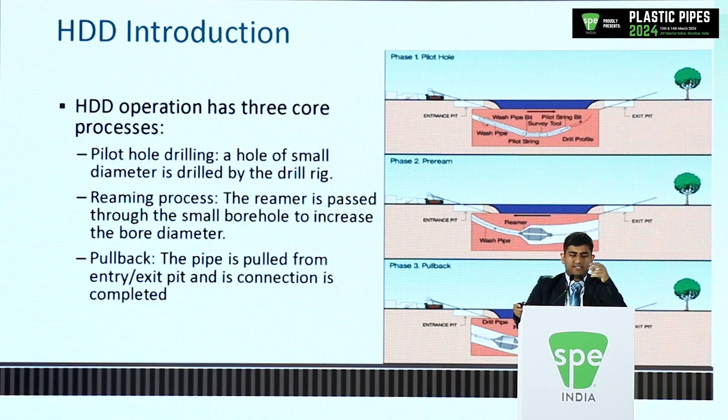And then there's the pullback process, which is where your role, your machine, your product comes in. Your product pipe is pulled back through the borehole, which is expanded via the reaming process.

So when we are talking about pullback force, it's basically the force required to pull the pipe, plastic pipe or whatever material pipe it is, through the borehole from the entry of the pipe to the exit of the borehole.

It must overcome two things: the friction caused by the ground, as well as the drag forces caused by the drilling fluid. We are drilling in the ground and require a lot of fluids passing through. Bentonite is there, and other mixed compositions go in there, so there's bound to be drag force involved.

In this session, we'll see the differences in why drag force causes a difference in mechanism or design as well.

This is a quick video. I think it plays, right? Yeah, so this is a quick visualization of the site conditions during the pullback stage, what your products actually go through in this process.

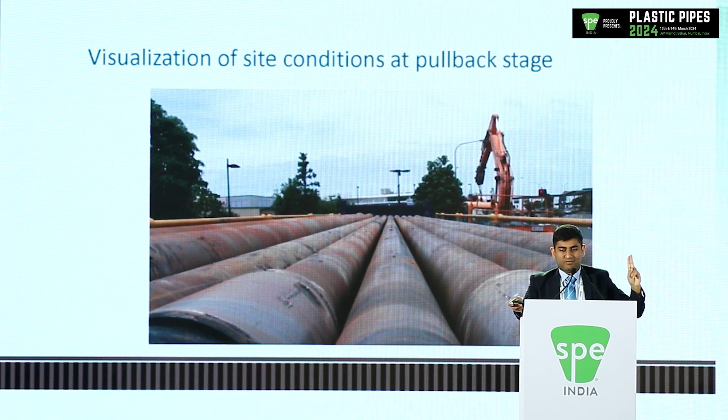This is the one end where the HDD machine, your drill rig, is present, and it's going to pull back the pipe through that entire borehole. In this case it's a steel pipe, but basically this whole process is generic for all types of pipe materials.

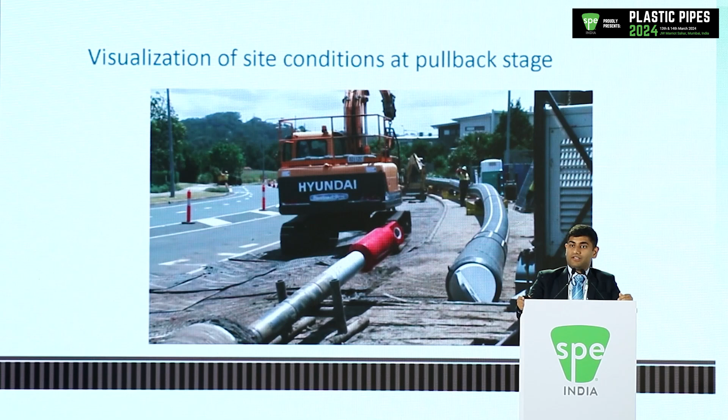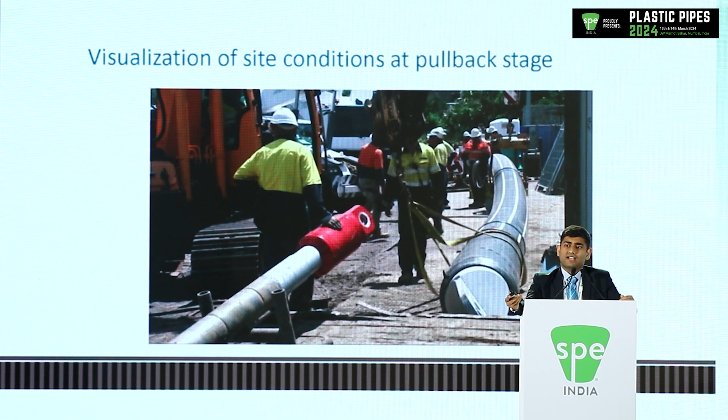You may observe that there's a reamer also attached before it to make sure you have a clear pass. Why is it important to have a clear pass? I'll show you in the form of images.

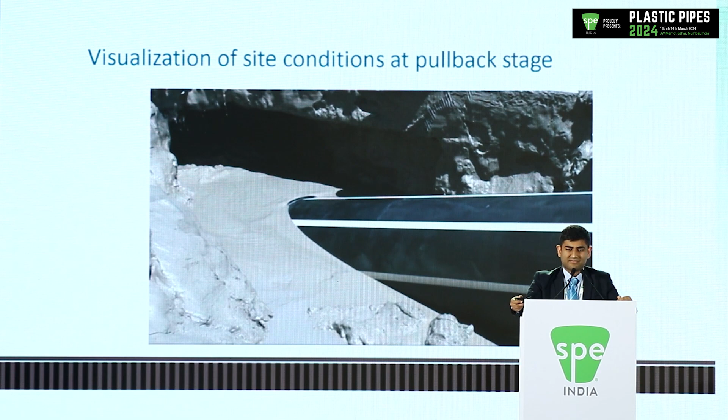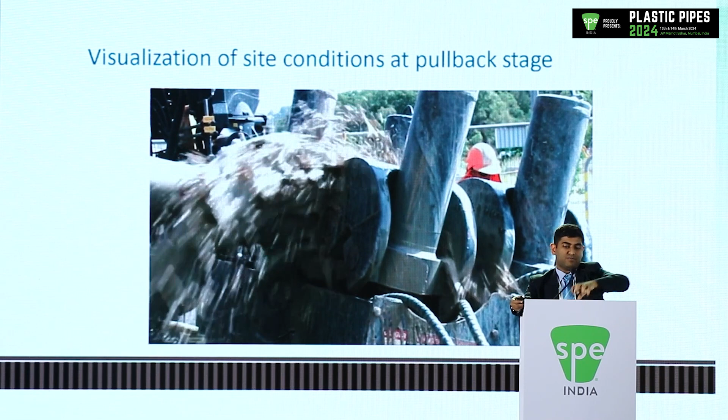Basically, each drill pipe is taken out. In that process, it's untied, taken out, then your rig gets attached to the next one, and it's pulled back again, and that series of process goes on and on.

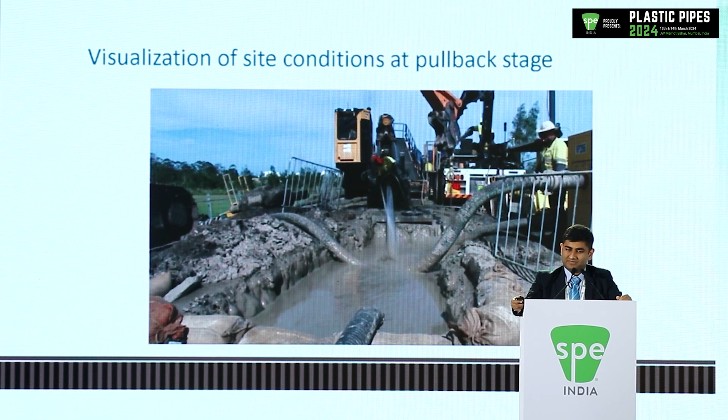And you see, this is called the luckiest day of your contractor.

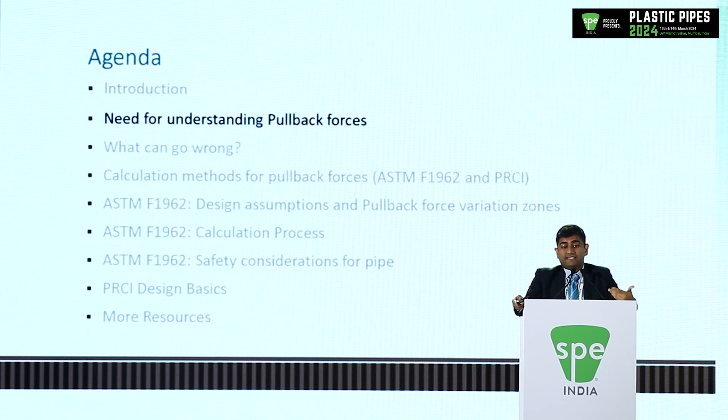So now that we have gone through this process, now that we have seen how it looks above the ground, why is it essential to know these forces? That is the challenge, right?

When we are talking about determining these pullback forces, it comes down to our conditions to set the project parameters. First, we need to know the strength of our machine, and that strength dictates the selection of your drilling rig.

The second point is where you guys come into play, which is pipe material and type selection. Your pipe's ability to bear tension as well as surface damage dictates which pipe is selected for this particular project.

When we are talking about these aspects, typically the failure we talk about is more in kinking or tensile failure of the pipes. That's where we determine the parts where we are bound to experience the most forces, through understanding the exponential effects of the small parameters present in the ground.

Small parameters, we talk about lubricating the ground using drilling fluids, right? But those drilling fluids still only minimize the friction, they don't make a frictionless surface. God would help us if we could make a frictionless surface - everything would be ideal for an 11th grade physics student.

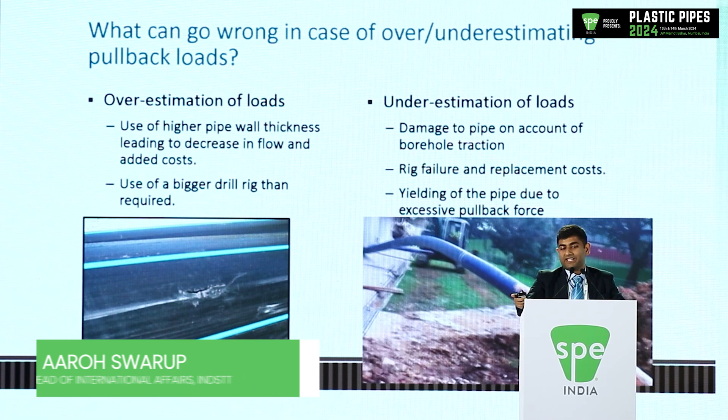Then the underestimation of loads is the other part, where I'll play this video of what happened in case of a rig failure. This was a rig failure situation, and mid process they had to take out a pipe using a crane. Messy situations, messy.

So let's discuss quickly and go over the methods of calculation of these forces. There are two typical methods: ASTM F1962 - these formulations are based on the 2011 iteration, and there's a 2022 iteration as well where not much has changed, just a couple more parametric additional conditions, nothing too special. The other method is the PRCI method, Pipeline Research Council International.

The ASTM method is what we'll typically deal with for most projects, and it accounts for flexible pipes where bending stresses are not very significant. The drag forces in these calculations tend to be a function of the diameter itself. This method does not account for the length of the pipe. It can be designed for all flexible pipes, but typically best case is for PE, HDPE, plastic ones.

The PRCI method goes for pipes with higher bending resistance. So when we talk about bending resistance, we're talking about bending radius, the forces that it has to bear due to bending loads. And then we're talking about the drag force being a function of the length inside the borehole as well.

So a quick go over regarding the ASTM method. These are some design assumptions: the pipe is a flexible pipe, friction is directly proportional to the normal forces - basic rules of physics. Tension amplifies at bends - this is the rule in physics we learn as Capstan's law, where around the pulley we experience exponential growth in friction when dealing with cables passing around a pulley.

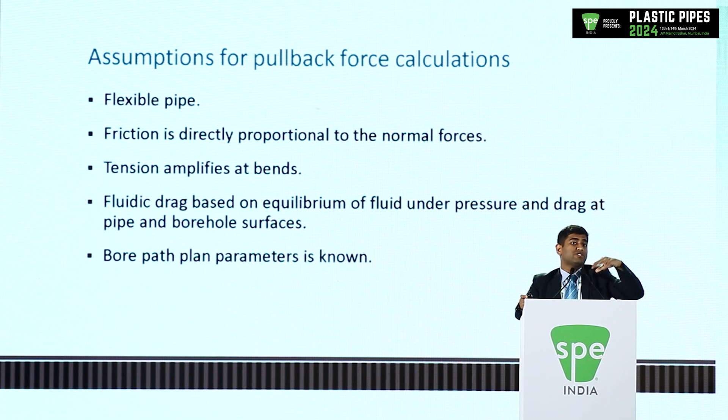Basically, this is where we discuss the operations design part. That is the project design part. We are talking about the operations design part.

The whole idea is that we divide this project into 4 segments. L1 is the part where the pipe enters your ground or enters the borehole with an incline angle of alpha. The exit angle is angle beta, and then there's a descent part. The horizontal length of the descent is called L2. The horizontal length parallel to the ground is L3, and then there's an ascending length called L4. These are the typical formulation parts essential for the design aspects.

The important items for the manufacturers and everyone here are the parameters typically used for selection of pipes: the diameter of the pipe, the diameter ratio - that is the outer diameter and the wall thickness, the length of crossing, the straight length of the pipe, the coefficients of friction at the surface as well as the lubricated borehole, entry and exit angle, preferably in radians. You can always convert, there's calculators everywhere. And then max depth of the borehole in meters, since we are doing SI units, it has to be in meters.

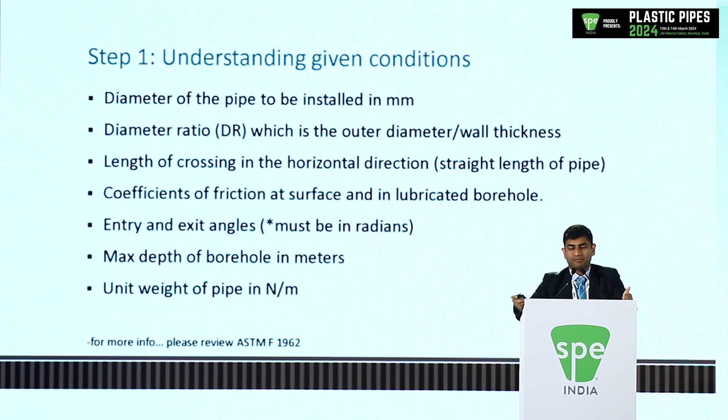Unit weight of the pipe in Newton per meter. Another 3 elements are specific gravity of the mud slurry, relative density, and the safe pulling stress of the pipe material - that's where you provide the information. Borehole diameter is typically 1.5 times the diameter of the pipe, that's a rule of thumb that industry follows during an HDD operation.

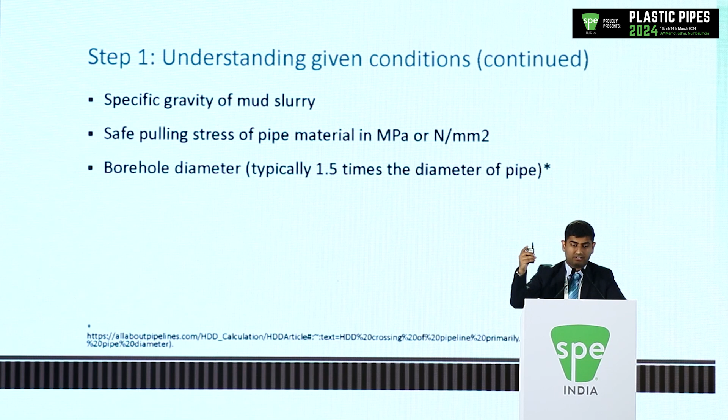So in terms of calculating these lengths, I'll quickly go over this. The L2 and L4, the ascent and descent lengths, are formulations based on trigonometry and arc circular formations.

Your first length, L1, the length at the entry of the pipe, is assumed to be 30 meters or 100 feet, whichever unit system you're following.

L3 is what your project parameters will dictate, typically the crossing or the design required for you to cross.

In a lot of cases, L3 can be 0, where you simply descend and automatically start ascending. So that is also a simple situation.

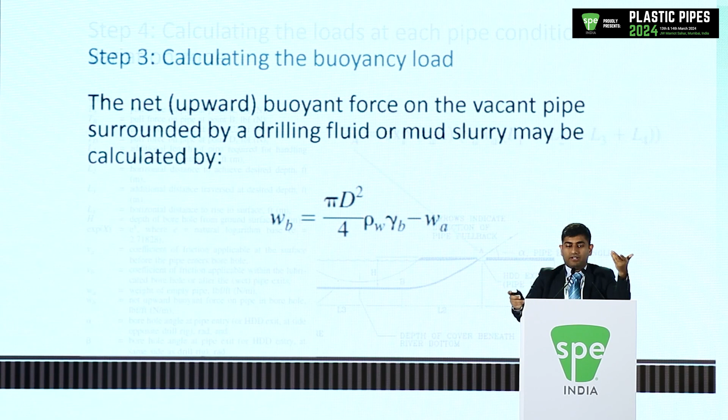Calculating buoyancy loads involves basic physics, your downward force versus the buoyant force of the drilling fluid. Then we talk about 4 zones of tension where your pipe will experience tension.

Zone A is the entry zone. Zone B is where the entry zone's force plus the friction come into play.

Buoyancy reduction, buoyancy resistance, and other parameters come into play, and they are multiplied by the exponential factor, which is basically the angle with which it changes the curvature of the path.

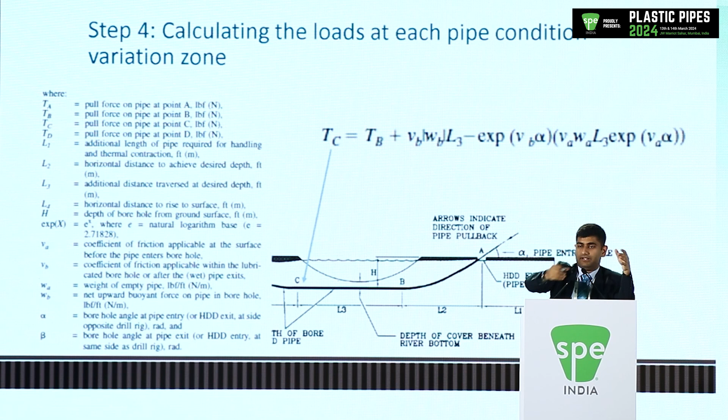The same goes for tension at zone C, where your friction gets added up and your curvature at the ascending portion comes into play. Then we have tension at zone D, the exit zone.

This happens to be the zone which will bear the most tension, the zone where you will face the maximum amount of force required to pull the pipe outside the ground.

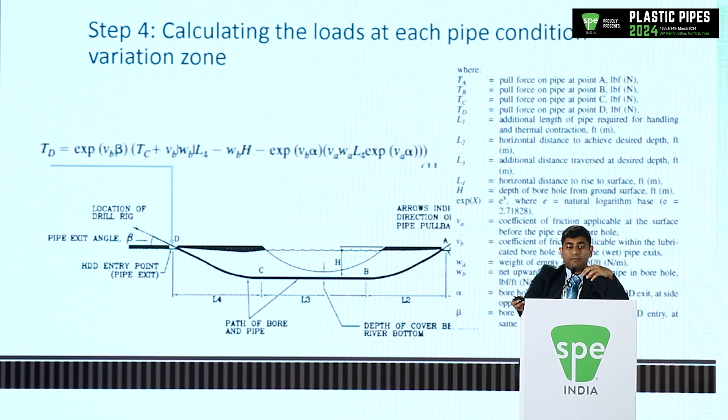Once you have maximum values of tension at zones A, B, C, and D, which is most likely going to be zone D, you add that force along with the drag force caused by the drilling fluid.

Drag force is simply this formulation: 0.07 megapascals times pi times d squared by 8, d squared minus d of the pipe, the diameter of the pipe.

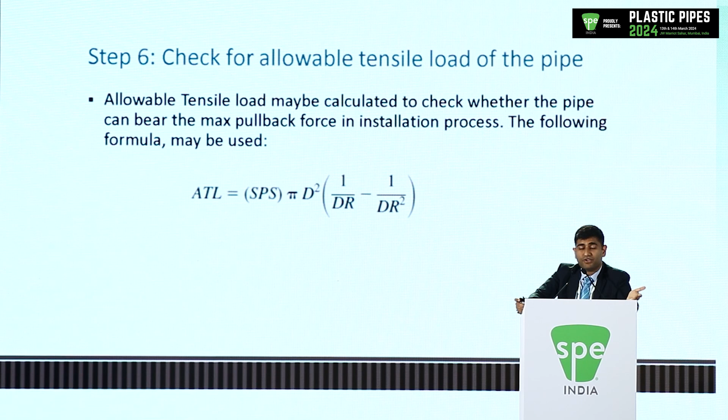Then you compare that value with the allowable tensile load of the pipe, and this is the formulation for that. This typical formulation is the simple physics formula that we've learned over the ages.

Safety considerations when we are talking about pullback parameters, the pullback situation.

In mid construction, when we are experiencing this, we should also account for thermal stresses and for reduced strength in materials, such as PE or plastic materials.

We should also account for the loading during the process. Since we are crossing, that means operations of the existing utilities continue without any hesitation.

Post construction, the important part is the as-built drawings, which should be approved by a utility engineer at the maximum to make sure that the information out there is realistic.

This is important for your clients and utility owners. The whole idea for as-built drawings to be accurate is to make sure that others don't hit your pipe.

Inspection and cleanup by certified HDD operators, assessors, and designers is where this entire post-construction process should also be maintained. Mr. Huck mentioned the annular gap present between the pipe and the borehole, which requires stabilization.

Those aspects are there, and your cleanup material should be environmentally friendly. These aspects are very essential when dealing with operations among civilians.

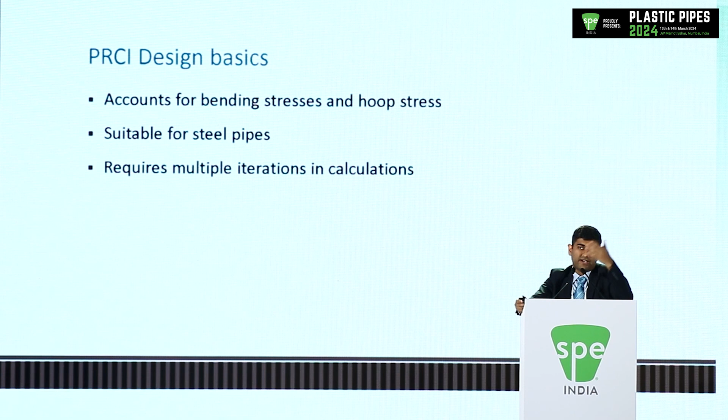It's calculated, then revised, then changed—we adjust the diameter, wall thickness, and diameter ratios and so on. I'll quickly go over this since it's less relevant to the current conference.

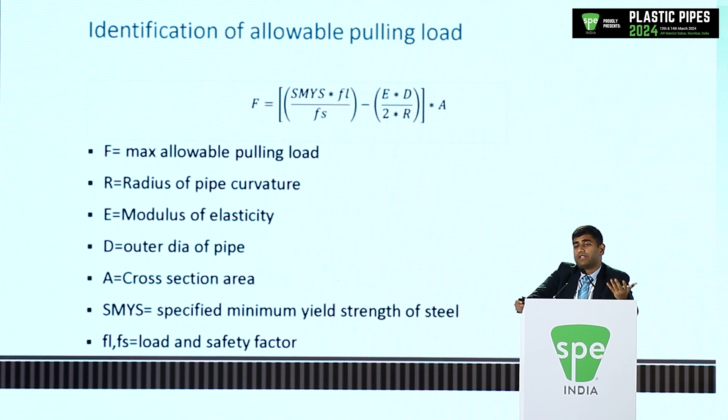The basic idea is to calculate the allowable pulling load, then move on to calculating the loads during the straight portion, which are the frictional, drag, and weight forces.

Typically it's the friction force which changes between the straight or curved portions.

In the curved portion, the friction formulation changes to hyperbolic tan functions and arc length of your curvature, depending on how big your curvature goes according to your bore path plan. These are the formulations, but I'll quickly skip through that since it's not used in plastic pipes.

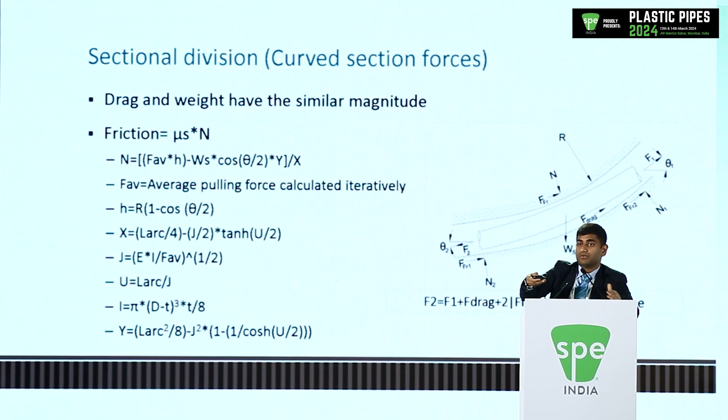Moving on, some more resources that are there that can be used for your further knowledge and research.

ASTM F1962, 2011 is the latest version. I'm sorry, I think I mentioned 2022, but it's actually 2011.

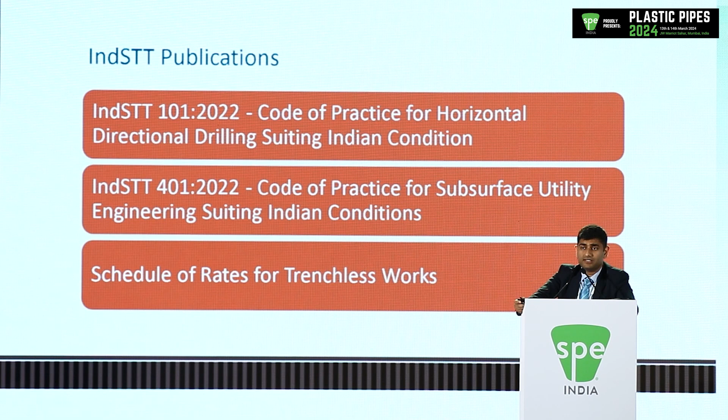I would actually recommend the code of practice to the gentleman from Mahanagar Gas. The code of practice is for SUE, and then schedule of rates is there for trenchless works. We invite everyone to take a look at these publications because you may find something useful for your own products.

Now this is a call for everyone who's a leader, an executor, innovator, or a technician. We host an award ceremony called IndSTT Trenchless Excellence Award, which is basically a series to promote the best practices in this industry. Having knowledge of this technology is one thing, but applying this technology to the best of its possibility and showing it to the world is what should be rewarded. That's where IndSTT's mission to promote best practices comes into play, and this year we are hosting this award ceremony in Goa.

Thank you very much, Mr. Dasgupta, for a very lucid presentation and easy to work with formulas. Especially this subject has become very important with so much urban installation going on where you can't work without HDD. Coming to the next paper, let me introduce the next speaker.

Dr. Ajit Salvi is the Chief Engineer of Municipal Corporation of Greater Mumbai, and his topic will be use of plastic pipes for durable water and wastewater network. Dr. Salvi is working with MCGM as Chief Engineer in Sewerage Operations Department. He has 33 years of experience in planning and maintenance of sewage conveyance systems, pumping and treatment plants. He has participated in various World Bank aided projects related to sewerage. He has been involved in mega STP projects of Mumbai with provision of recycle and reuse of treated wastewater. He has implemented various projects using new technologies, including use of biotechnology for sewage treatment in big STPs.

He has published various research papers. He is a resource person for subjects related to water and wastewater for various government missions such as Amrut, Swachh Bharat Mission, NULM, etc. He has also been involved in training engineers and elected representatives of municipal corporations in the Western region for various government initiatives. He is a resource person for various management development programs. He is a National Council member of Indian Society for Training and Development, Mumbai chapter. He holds a BE, MBA and PhD. He is a visiting faculty at various technical and administrative institutes including Mumbai IIT, Yashada Pune, and AIILSG Mumbai. He is a prolific speaker and I have seen him in many forums.

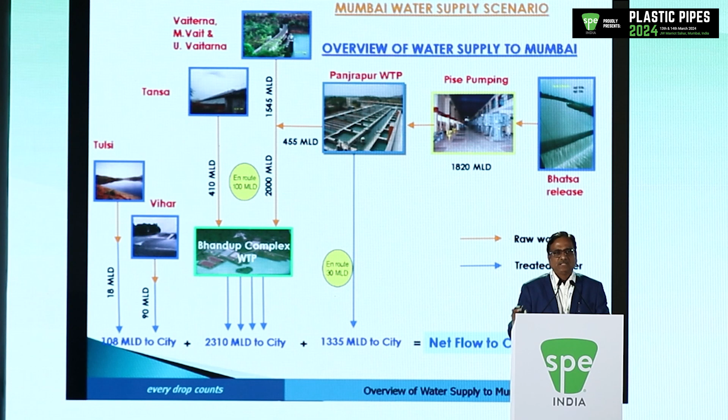Again, when I say 100 to 150 kilometer traveling is there, it is piping, nothing else. Nowadays we are going for tunnels also. We are going for tunnels also. But otherwise, the majority of the transportation, the majority of the conveyance, is done by piping only.

So if you see the overall Mumbai water supply scenario, there is a source, maybe a river or something, some reservoirs, then distribution mains, service mains, and then consumer connection. In a simple way, there is a primary network from source to the dam, then from dam to the reservoirs there is a secondary network, and from reservoir to the consumer that is a distribution, or tertiary network.

So there is a problem. Some places have a sufficient quantity of water available, some places are facing difficulties. Then there is quality of water which is also important.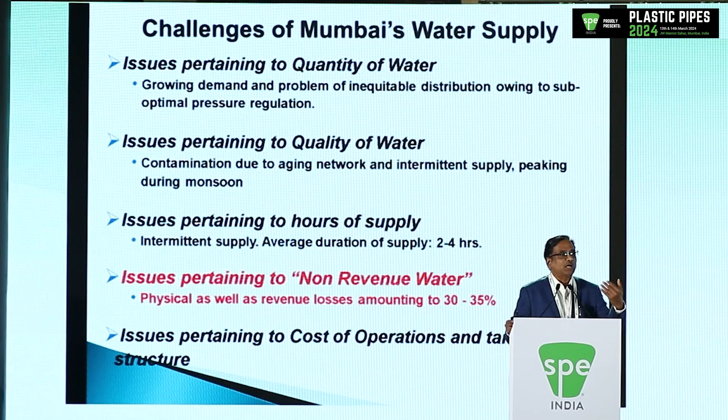Wherever, particularly in the old city of Mumbai, it is still supplied water for limited hours because chals and hutments are there. So every 2 hours, 3 hours water is supplied. Some places even at 1.5 hours water is supplied.

Then I will talk about the issue pertaining to non-revenue water. This is important. This non-revenue water means there is physical and revenue loss, and it is almost 30 to 35%, sometimes more. You can take it from me, if you consider the entire city or entire India, it is always more than 35% or 40%. That is non-revenue water.

Basically, some of it is theft and some of the water is leakage. Now, so far as this particular forum is concerned, we are more interested in the leakage part and we have to arrest that. I have a separate slide for that.

So this 30 to 35% NRW is a huge quantity. Just consider, our water supply is 3850 million liters per day, and if you compare 30% of that, even Chennai's entire water supply is not that much. That much supply is not there, and that is just what we are wasting as NRW.

So this is the point, challenges we have to address, and this forum is for that also. One of the objectives is that. Issues pertaining to the cost of operation and tariff structure - lots of problems are there. Everybody wants water free of charge or at a subsidized rate, and that is again a big trouble. I am just avoiding that discussion here.

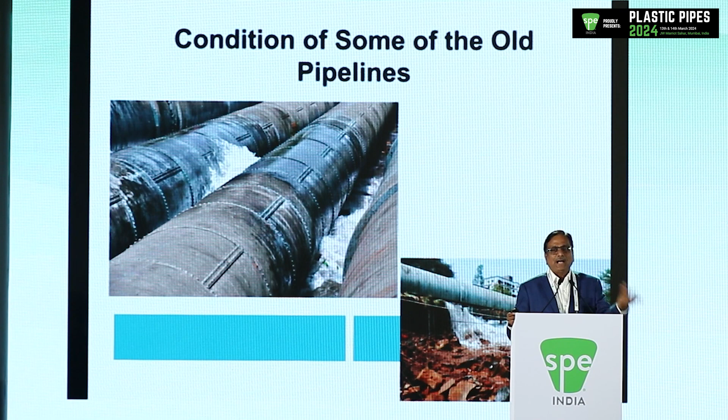Now, leakage - sometimes a picture is worth a thousand words. So you can understand how it happens and how many liters of water are wasted whenever there is leakage, and sometimes it is intentional also - some theft, some part of society is doing that too. So that is what is happening.

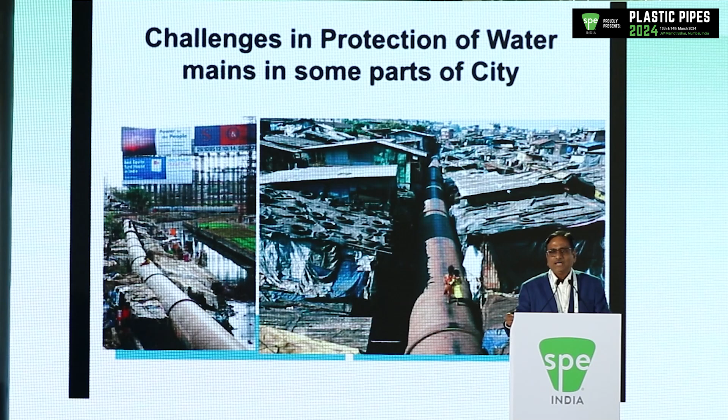You can see the challenges in protection of water mains in some parts of the city - this is about Mumbai and how to protect that supply, that is the problem. So you can think about quality also, you can think about leakage also, so it's not an easy target. Though we are treating water up to a good standard at our treatment plant, when it passes through the hutments and all, there is every possibility of pilferage and other quality aspects being in trouble.

See, higher water mains, now you see the distribution mains. This is how the water pipes are passing, and sometimes you can understand how leakages are happening, how thefts are happening. It is sometimes not metered - that's a tariff aspect. Anyway, forget that, just focus on how to address the leakage, how we can replace this pipe with better, leak-proof material. That is the point I wanted to put in front of you.

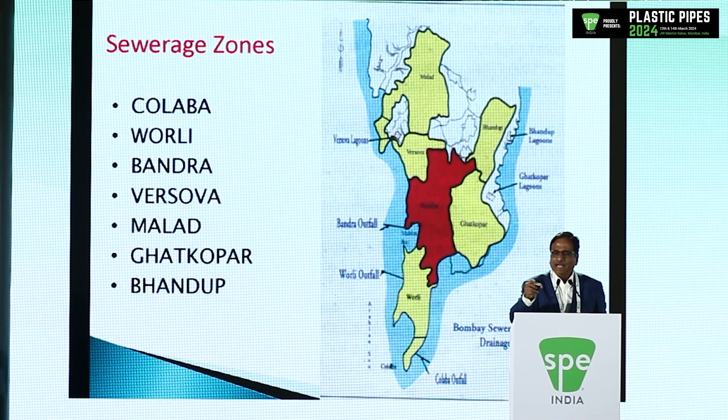My point is, every day water is supplied at 3850 million liters per day. After considering NRW, theft, or leakages, whatever water is supplied to the city, the next day it is converted into wastewater. So both systems have to be kept in operation - one side the supply of fresh water, the other side immediate treatment and disposal of wastewater.

I will tell you that the wastewater side is more complicated and difficult, because there are no reservoirs for wastewater, no dams for wastewater. It has to be operated 24/7. There is no mega block for wastewater - that's allowed only for railways, not for us. So there's no mega block, no reservoirs, no dams. That particular part is not easy to keep in operation and maintenance. That is a difficult task.

And again, the majority of the part is the conveyance system - that is the pipe work. Material is another aspect we can discuss. So this is how the general thing is concerned for any city. But so far as Mumbai is concerned, as I pointed out with statistical data, it is comparatively huge.

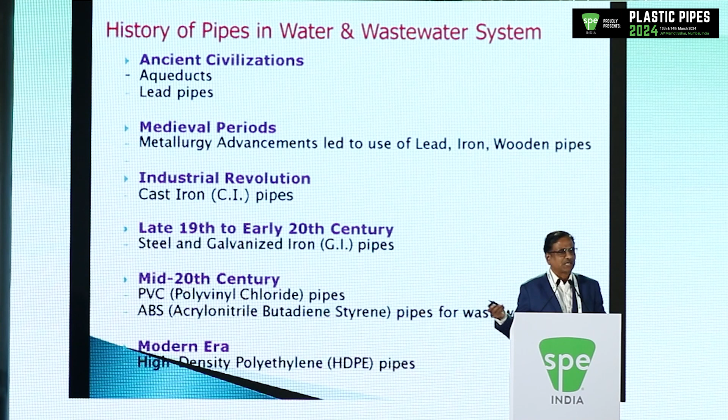Now, just as a matter of fact, this slide I put in for understanding that pipes are not new - you can see the history. From ancient civilization, lead pipes were there, aqueducts were there. In the medieval period, it was lead, iron, and in some places wooden pipes, particularly for carrying wastewater. After the industrial revolution, cast iron pipes came into picture, then in the 19th and early 20th century, steel pipes and GI pipes. Then in the mid-20th century - of your interest - PVC pipes and ABS pipes are there. And in the modern era, with more improvement in plastic, HDPE pipes are also there. This is only indicative - many other materials are also there. It's just indicative of how things are changing, from metallic or wooden pipe slowly we are going towards plastic pipe. That is how I wanted to show it, nothing else.

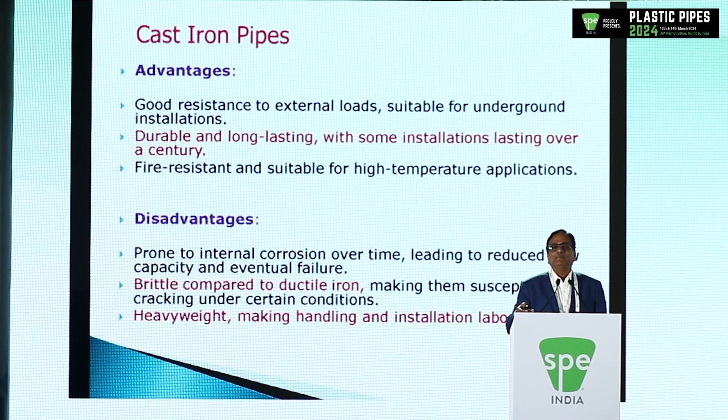There is one more aspect here. Particularly when you talk about CI, it is an attraction for antisocial elements because it has a good scrap value, which is not so in case of DI. That is also one aspect we consider, particularly on the sewerage side.

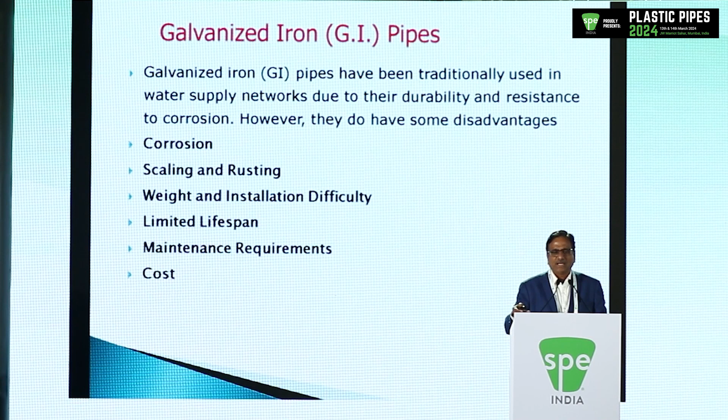Then very commonly used is what? GI pipes. That is very traditionally used and has lots of advantages. But on the other side, you will find there is corrosion, scaling, weight and installation difficulty, and maintenance problems also. So that is what about the GI pipe.

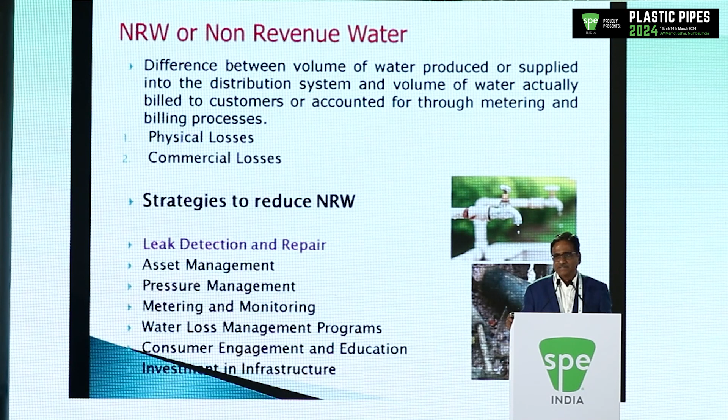This particular thing I was talking about is NRW. In some slide I said it is around 30 to 35%. So this NRW is a big problem, not just in Mumbai but anywhere, particularly in India. If you compare with Western cities or developed countries, their NRW is 5% or 10%, and our NRW is 30 to 35%. Lots of leakages are there.

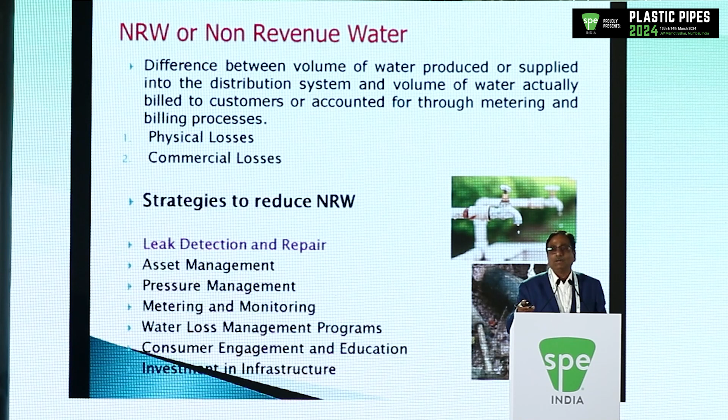Now this is the point where we should address it. As a part of theory, I have mentioned strategies to reduce the NRW, but I would like to highlight the first point, which is leak detection and repair. That is the main thing; other things are okay, they are there, but if leak detection and repair are addressed, everybody can understand the reason. I can show you in further slides how leak detection works, what the problem is, and how that material has to be replaced by suitable plastic material. As I said, you will find that in the majority of cases we are using GI pipes.

GI pipe is very common, even in the drainage pipe network in your buildings. Lots of GI pipes were used in olden days, but slowly we are replacing them with plastic pipes. What is the problem with GI pipe? No doubt it is good, but lots of corrosion problems are there.

I think this photo is sufficient, everybody must have seen that. If you remove an old pipe, maybe around 10-15 years old, these conditions are there. Those staying in a cooperative society, it is a common problem - they say pressure nahi aa raha hai, pani ka pressure nahi aa raha hai, problem ho raha hai.

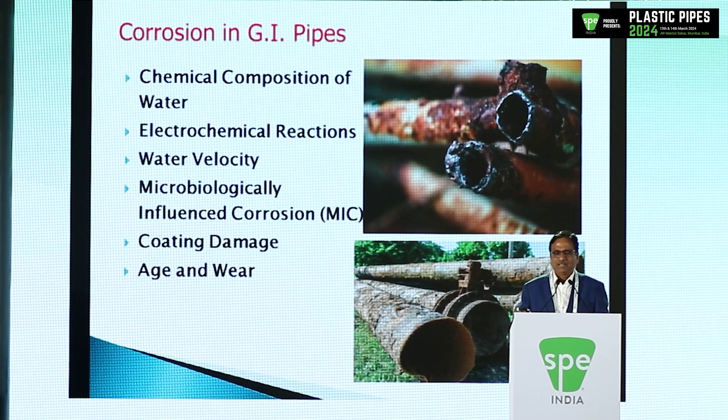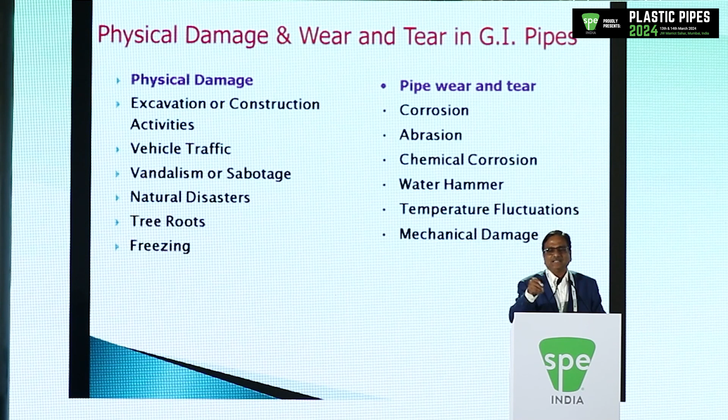Over a period of time, you have to go for replacement of the entire pipe network. So mainly the corrosion aspects are there, then there are joint failures of the GI pipe - that is also very common. Wherever joints are there, if not done properly, because of corrosion and poor installation, joints fail and lots of leakages happen. Physical damage and wear and tear of GI pipes are also there, and these are the difficulties - we need to make sure we replace that.

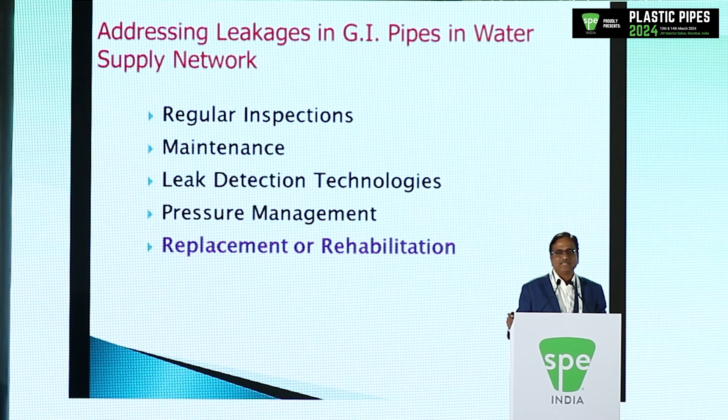Addressing the leakage in GI pipes and water supply network - I talked about the problems and difficulties in GI pipe. What are the steps to be done? As an engineer I have stated so many solutions, but let us concentrate on the last line - that is replacement and rehabilitation. Either go by replacement with good, improved material, or do rehabilitation in case it is a big size pipe, as Sarupji was talking about.

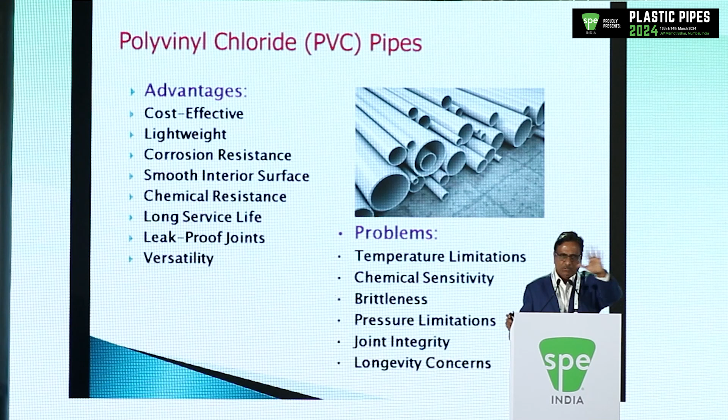Replacement can be done either by PVC pipe, HDPE pipe, or DWC pipe. These are general indicative examples of how you can do that. No need to talk about advantages and disadvantages of PVC pipe since everybody is aware. It can be HDPE pipe also, similarly for DWC pipe. So these are the replacement aspects possible because of the wear, tear and corrosion problems in GI pipes.

When you go to the wastewater side, these are the old pipes - mainly stoneware pipes, and in comparatively new cases, concrete or cement pipes. Now when we did our CCTV survey of all our drainage network - he was talking about CCTV survey - this is what we found: cracking and breakages, root infiltration, corrosion, sedimentation, joint failures, scaling and deposits, temperature sensitivity, and age-related degradation.

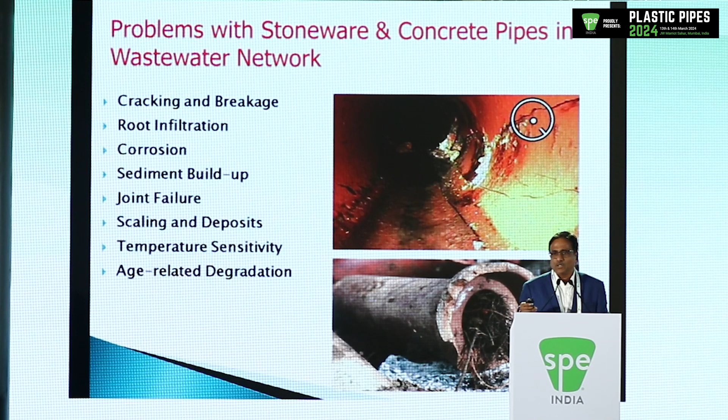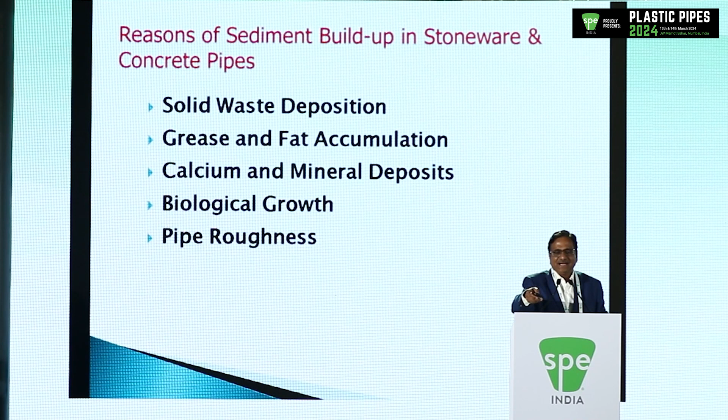In olden days there were no other options available, so stoneware pipe was the only solution. But we find that over a period of time it creates lots of difficulty and problems, and I have tried to highlight that. In other slides I talk about the reasons, but let us go ahead - I would like to show you the different reasons why stoneware pipes are making difficulty.

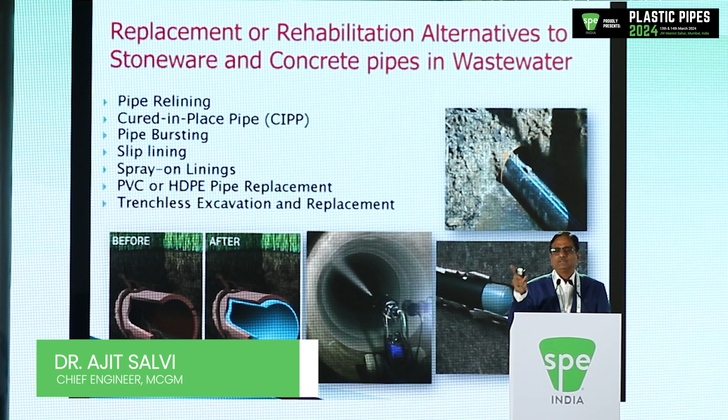That is what pipe bursting, fold and form method, CIPP method, CIPP with UV lining, MWSL lining, geopolymer, GRP lining - various technologies. And all these materials are nothing but various grades of plastic.

The British laid this network somewhere 130 years back, and we are still using the same network by using trenchless technology. We are not scrapping the network and going for new, but rather using the same line with the help of trenchless technology. And when I talk about trenchless technology, there is only one answer - plastic pipes, in one or different form, nothing else.

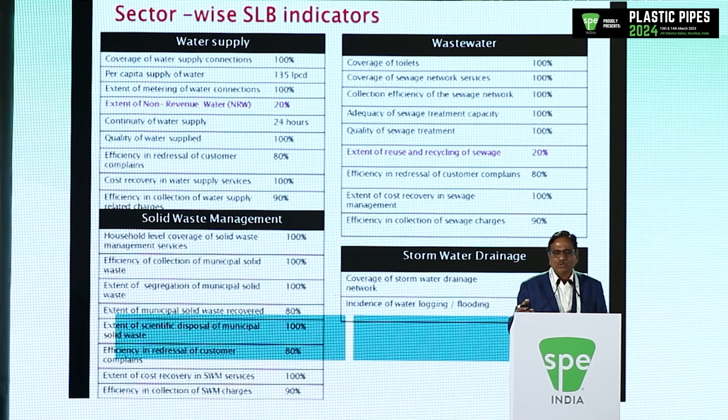I can show the further slide. The recycle and reuse means whatever wastewater is generated, we have to recycle it and reuse it for non-potable purposes. That is what the guidelines say - government says at least 20% should be recycled and reused.

Now again there is one opportunity. 1,271 million liters of treated wastewater is available for non-potable purpose, but that will be available in our plant - we have to take it to the consumer, we have to take it to the industries. How to take it? Again, by laying the pipes. Which pipes? There is no other solution - plastic pipes.

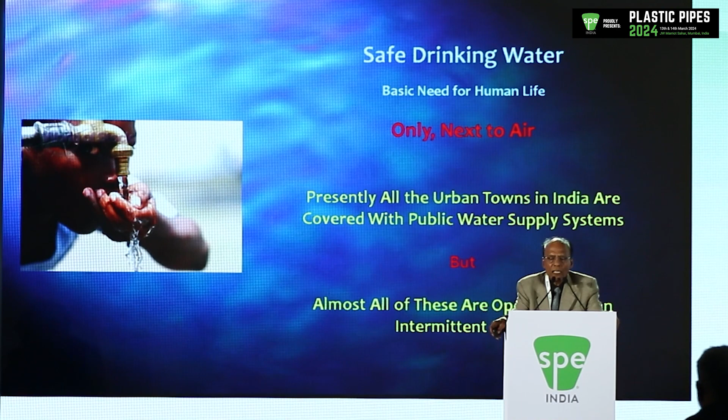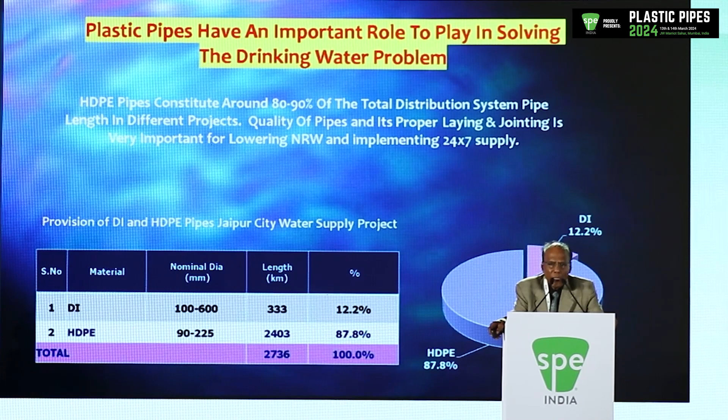Safe drinking water is the basic need of human life, only next to air. Presently all urban towns in India are covered with public water supply systems, but almost all of these operate on an intermittent basis. When I was invited for this conference, I thought about the context for my talk - plastic pipes have an important role to play in solving the drinking water problem. Right now we are doing a drinking water supply project in Jaipur, a new greenfield colony project, so I've put in the data on the breakup of pipes in the network. The length of HDPE pipe is 2,400 kilometers across 46 zones, and DI pipe is only 333 kilometers. In Rajasthan's urban and rural projects, the share of HDPE pipe is around 90% or higher. So laying quality HDPE pipe correctly the first time before it goes underground is very important in providing safe drinking water to the public, both urban and rural.

What does the consumer expect from water supply? It should be potable, reliable, of adequate quantity, adequate duration, adequate pressure, affordable, with a consumer-friendly complaint redressal system. But there is no demand from the public for a 24/7 water supply. Like for electricity, in urban areas we demand 24-hour power supply. But in urban houses, we have sumps, we pump water to the overhead tank, and we have a 24/7 water supply in our kitchens and bathrooms. So for public water supply, there is no pressure from the public, and there is no target from the politicians to convert the systems.

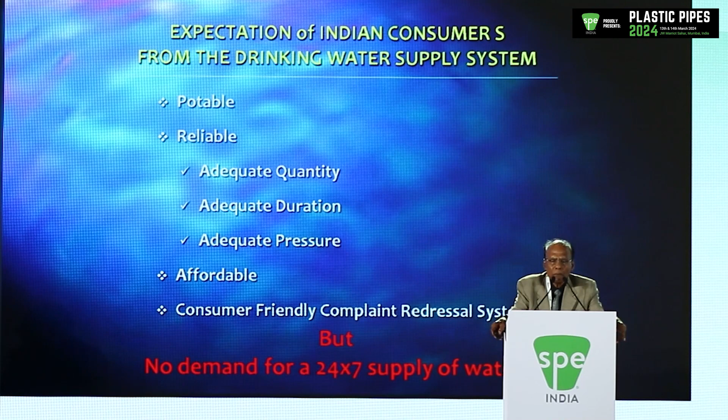What is the existing status? Coverage in peripheral areas remains uncovered. Reliability shows intermittent supply and unequal distribution. Duration is half an hour to 3 hours per day, often at odd timings when zoning and sub-zoning are done. Pressure is low, requiring household level storage and boosting. There are problems of pollution in the pipeline in intermittent supply systems. Interface with consumers needs improvement, and there is high coping cost at the consumer end. But if we have a 24/7 supply, it can solve most of these problems.

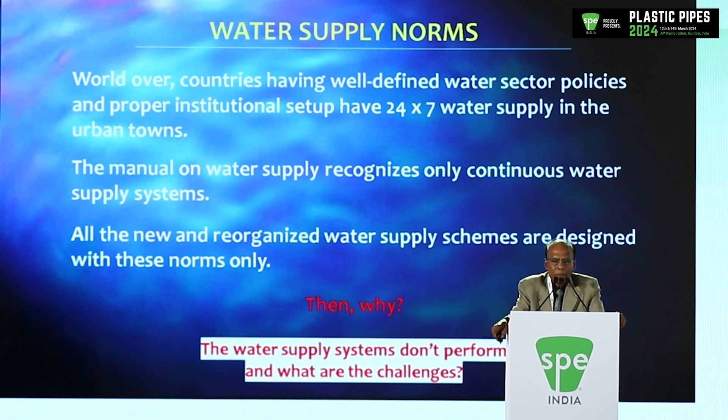World over, countries having well-defined water sector policies and proper institutional setup have 24/7 water supply in urban towns. In the water supply manual, both the old and new manuals, it recognizes only 24x7 water supply - there is nothing like intermittent water supply in the manual. All the new systems we design, and reorganized systems, are designed on a 24x7 basis, considering the peak factors for 24x7. So why don't the water supply systems perform on a 24x7 basis? What are the challenges? I've tried to categorize these challenges as technical challenges, water availability, financial availability, institutional setup, community and cultural issues, and then there are political issues.

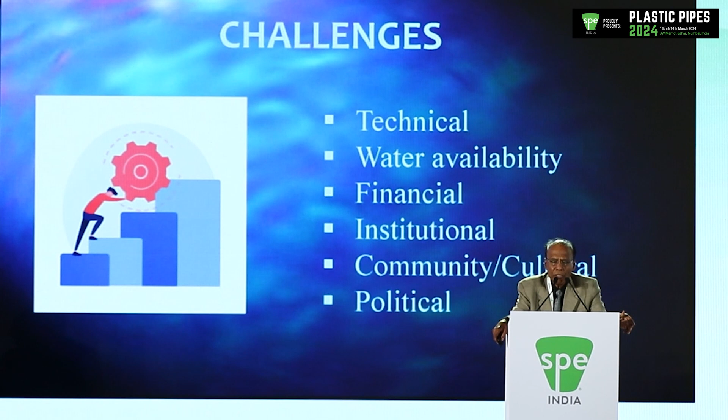Technical challenges, as my previous speakers have spoken, include high leakage and unauthorized connections. This is what we call non-revenue water. It has two components: a technical loss and a non-technical loss. Technical is the physical loss of water which doesn't reach the consumer, and non-technical or commercial loss is where the water reaches the consumer but we are not able to bill for it.

A typical NRW survey was done some 15 years back in one of the towns with a foreign consultant, TCE. We found that 25% is the physical loss and 15% is the commercial loss.

The most important challenge is that consumers draw water into their underground sumps. When we open the valve of the distribution reservoir, the water flows from the reservoir to the underground sumps. That is the biggest challenge in our intermittent system, because of the intermittent system.

Then there's non-availability of updated maps. My previous speaker had also spoken, from Suez, that there are no records available. If you are going to find out leakages, we don't know where the pipes are laid exactly.

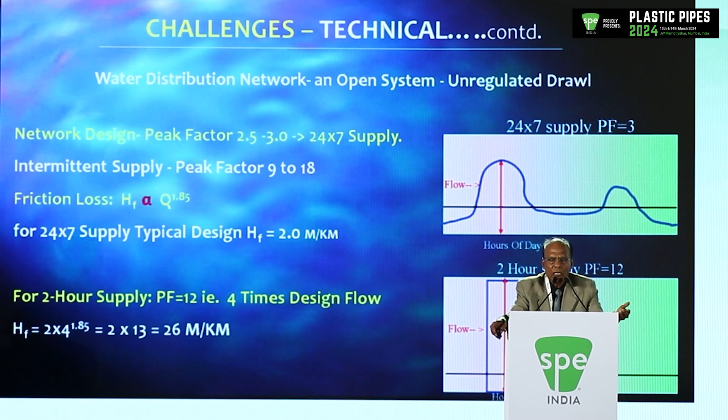Now, what is the problem? We design a system - this curve on top shows a 24 into 7 supply on which we base our design. Here, the peak demand during the day is about 2.5 to 3 times the average demand on which we design the system. But when supplies are made in only 2 hours or 1.5 hours, the peak factor is like 12. And in a typical distribution system, the head loss or pressure drop is like 2 meters per kilometer, which rises to 26 meters per kilometer.

And the result is the pressure drops immediately after the reservoir, and within 100 to 200 meters the low pressure zones start, due to very high demand and heavy head loss in the initial pipes.

Then, water availability - I'm talking particularly about Rajasthan. We have like 220 towns and we are bringing water from a long distance. For all major towns, we have been able to increase the water supply availability. You would see that the first 12 towns have water availability of 160 liters per capita to 277 liters per capita, and the next 13 towns, 135 to 156.

But only 7 of the 12 towns have a daily supply, and 8 of the 13 towns have daily supply, and the remaining towns have alternate day supply. This is purely due to lack of demand management. These remaining towns cover around 50% of the total urban population of Rajasthan.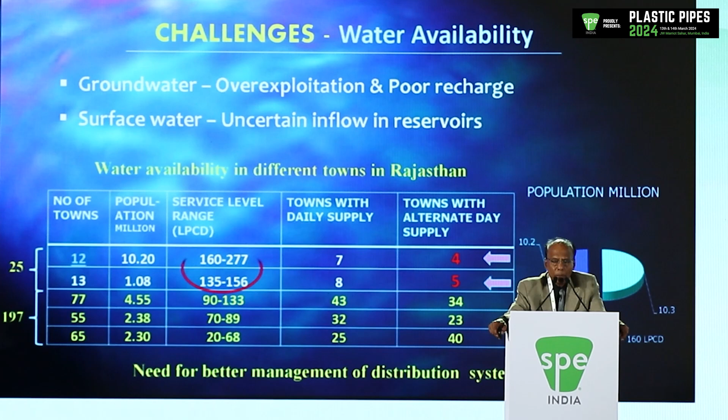197 towns have water availability of less than 135 LPCD. So demand management is a huge problem, and it's the basic requirement for converting intermittent supply to a 24 into 7 supply.

Then there's the institutional challenge. Our organizational setup, maybe for different states, other PHEDs also - we are basically a public works department. As the engineer from Suez said, we do not work as an operator, but we work as a construction department, and our contractors have a mindset of a construction company only. So there's a huge problem.

There's an absence of a cadre with the required qualification and specialization for non-revenue water reduction, for accurate mapping, for record keeping. So that's a problem. There's also a lack of autonomy and accountability.

Even for small repairs or small things, the file or budget requirement has to go right up to the top, and the sanction trickles in late. So the idea of 'a stitch in time saves nine' - we are not able to do. The manager at the town level should have the autonomy to take up repairs and do the required things.

Another point is the lack of appreciation of sectoral issues among the decision makers - meaning the bureaucracy and the politicians. There's also a lack of collection of primary operational data and performance reporting.

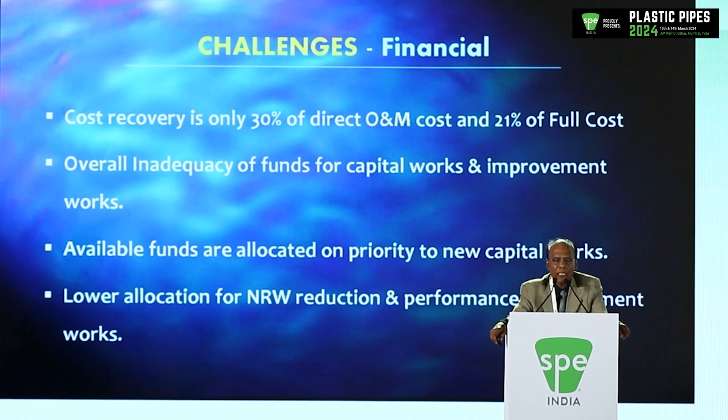Political: there is a lack of support for change in institutional setup. We have had a lot of consultancy reports by World Bank consultants, KPMG, Deloitte, everybody saying that you have to change your organization, you have to have specialization, positions for customer requirements, positions for different tasks. But it's very difficult for bureaucrats and especially politicians to understand this requirement, and we continue to work as a construction department, a public works department.

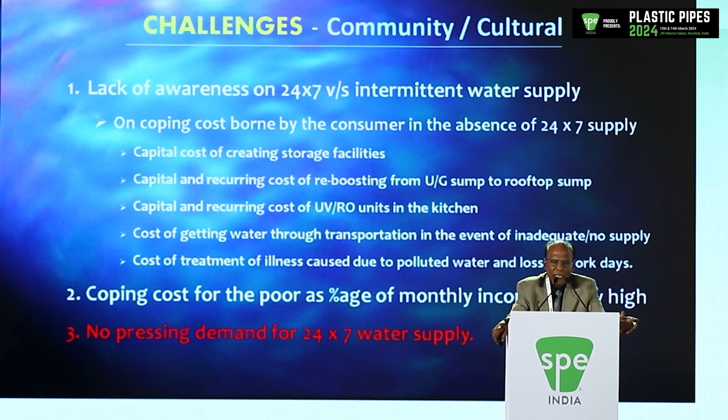Community and cultural: there's a lack of awareness on the 24 into 7 versus intermittent water supply. In absence of a 24 into 7 supply, what are the coping costs a common consumer is bearing? Coping costs borne by consumers include capital cost on creating underground storage, and capital cost of reboosting from underground sump to rooftop.

The average power consumption for this is 250 to 500 rupees per month, which the consumer is ready to bear. But when it comes to raising tariff, they look otherwise, or the politicians make them look otherwise. There's also capital cost and recurring cost on UV and RO, since every kitchen now has a UV or an RO system.

There's also the cost of getting water through transportation when water supply is not available, and the cost of treatment of illness caused due to polluted water. I have worked out these costs in detail from different houses, from my own family and friends, and this works out to 600 to 700 rupees per month on all these costs.

When you count this coping cost as a percentage of total monthly income, it is much higher for a poor family compared to well-off people. For us it may be like 0.1 or 0.2 or 0.5%, but for a poor person it might be 6 to 10% of monthly income. But still, there is no pressing demand from the community for a 24 into 7 water supply.

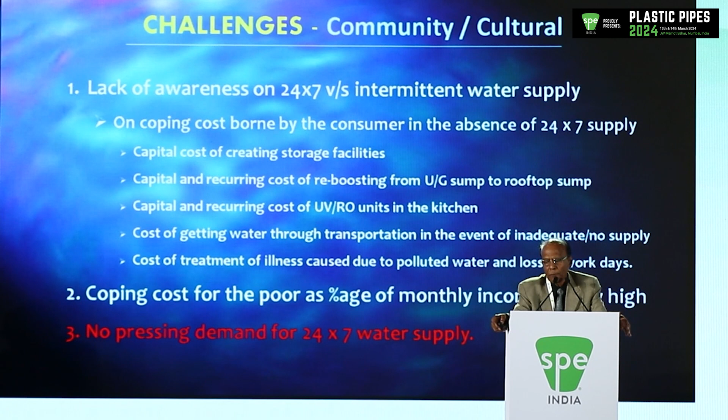We have made efforts in different towns, as my friend from Suez mentioned, in Maharashtra, Hubli, Dharwad, Jamshedpur and other towns, and in Rajasthan also we have very good contracts where 100% pipelines have been changed and new water supply systems installed. Non-revenue water has been brought down to less than 10%, in some towns as low as 7% or 5%. Still, we don't have 24 into 7 supply, even though water availability is 150 LPCD.

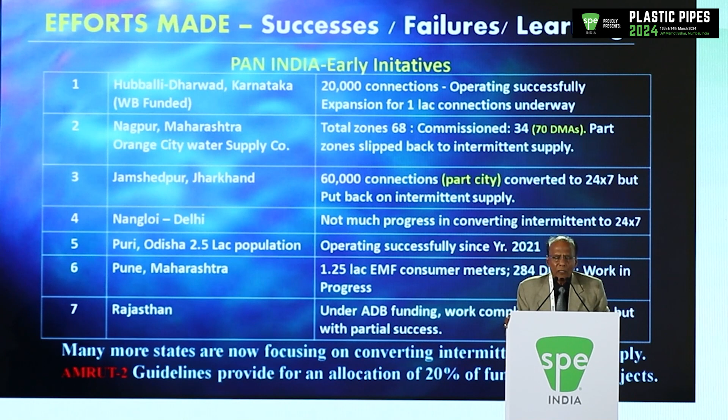This is because of demand management issues - tariff is still very low, and people are still drawing water into their sumps. Therefore, we have not been able to convert them to 24 into 7 despite low non-revenue water and water being available.

But I can tell you, 20 years or 25 years back, we had implemented a rural water supply scheme with 40 liters per capita, and the scheme ran successfully on a 24 into 7 basis at 40 LPCD. The water was provided on public stand posts, and the community was involved in maintaining the systems, with cost recovery from every household. A village volunteer collected the money and deposited it in the bank. The community had formed a village water management committee, and they were maintaining the system.

Then came the political pressure, and people were allowed to put illegal connections and draw water into their homes and sumps, and the system collapsed. So it's not rocket science per se.

When I was chief engineer, we converted a few of our zones, pilot zones, with AC pressure pipes, and installed meters in pilot zones of 500 connections each. We had some 4 or 5 such zones, and I noticed that we brought down the NRW to 20% with AC pressure pipes and no special measures. The peak factor was also brought down to 2.2. So it's not rocket science.

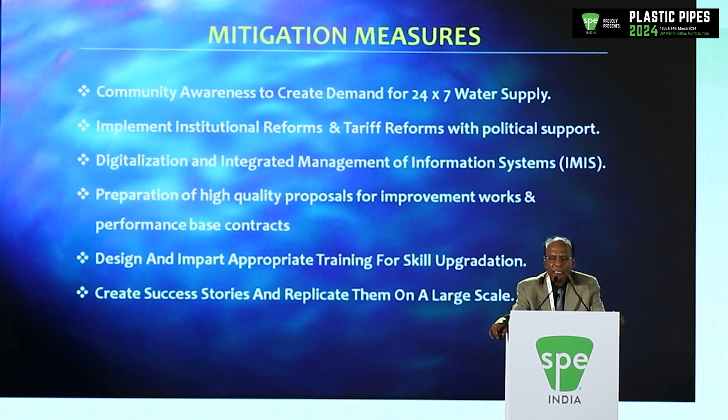So close to my chest is tariff restructuring measures and demand management. Control on demand and improvement in water use efficiency at the consumer end improves financial stability, improves overall efficiency of the water supply system, and promotes use of recycled water. Now, in my state, the highest domestic water tariff is only 6 rupees per kiloliter. If recycled water costs 10 rupees, then who's going to buy it?

I'll show you. This is the tariff structure. More than 40 kiloliters is 5 rupees 50 paisa, starting from 1.72 rupees per kiloliter. There is an absence of any policy per se for tariff revision. Tariff increases happen at long intervals, revisions are ad hoc and small. In Rajasthan, the last revision took place in 2017. There is a uniform tariff throughout the state. Domestic tariff is this much.

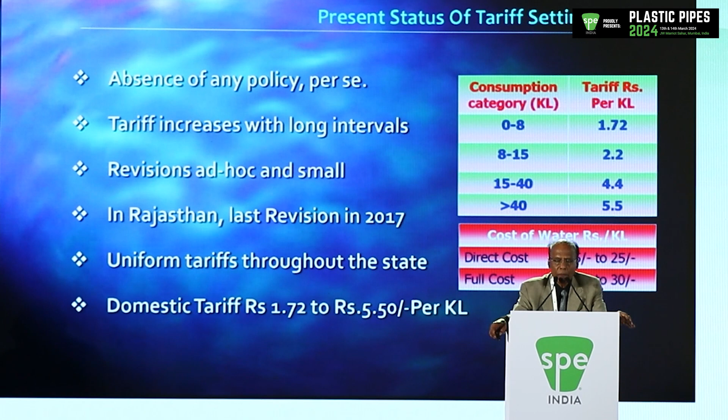My production cost in Jaipur is 22 rupees a kiloliter, and we are supplying water at 5 rupees 50 paisa a kiloliter, so they are getting this much subsidy. In Udaipur, where water is brought from still more distances and the lift is more, it costs 30 rupees a kiloliter, and this guy is getting a subsidy of more than 2000 rupees. So it is ridiculous.

There should be a cap on subsidy, like we have in ration distribution on a per capita basis. So what I propose is the tariff should be on a per capita basis, with a count of the number of persons in a house, so that their eligibility for subsidized water is known. For the remaining quantity, they should be billed at actual or full cost, or with some rate of return or punitive cost. What should be the abstract level of thinking? Safe drinking water is a social good, but only up to lifeline consumption levels.

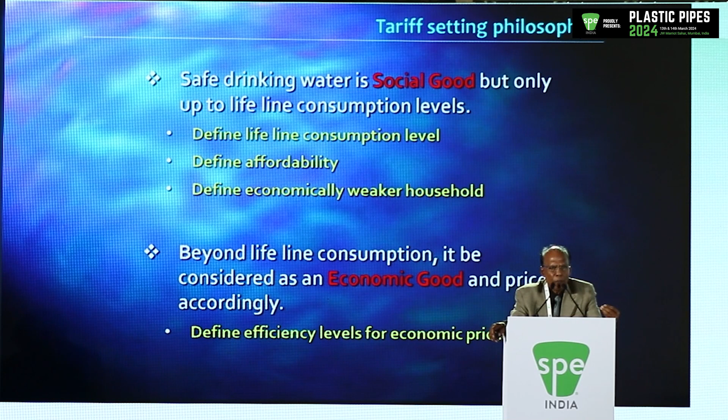So let us see what would be the cost of water. Like Jaipur, it is 22 rupees, so it gets to 15 rupees. So at least we start charging 15 rupees.

So the question is, what are the underlying reasons for intermittent supply in India? Technical constraint, lack of human capacity, financial, cultural, political, historical, or water scarcity? The answer is the institutional framework. The technical, organizational, and financial difficulties are symptoms of a wider problem. A good institutional framework is one which promotes good governance and overcomes technical, human resources, financial and cultural difficulties.

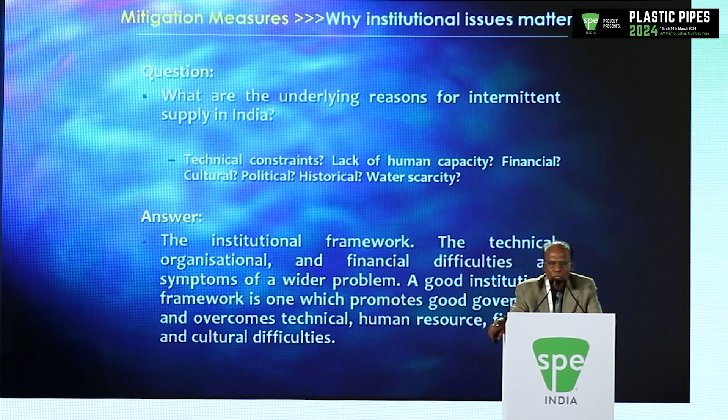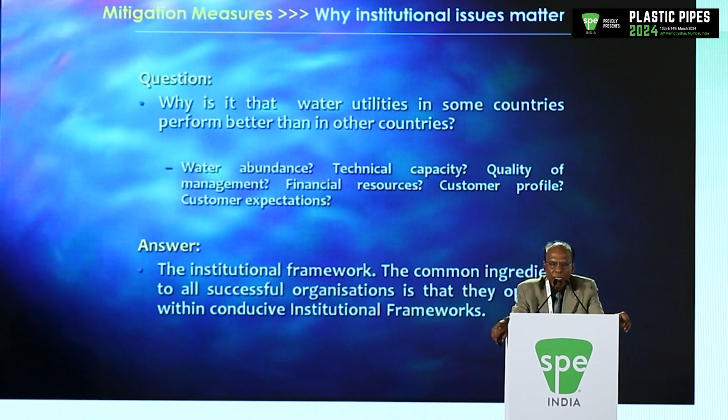Then the question: why is it that water utilities in some countries perform better than in other countries? Water abundance, technical capacity, quality management, financial resources? The answer is the institutional framework. The common ingredient to all successful organizations is that they operate within a conducive institutional setup.

Friends, Israel has water availability much less than that in Rajasthan. Still, their per capita supply is much better, their water services are much better. Many of our politicians and bureaucrats have toured Israel, but they have not had the courage to take the reform measures so far. I don't know about other states.

What it could be - the organizational setup - and now we are talking of direct cash benefit, like LPG cylinder. The villager, the poorest of the poor, has to buy at the market price, and the difference is passed on to the customer directly into his bank account.

So on this philosophy, while I was in office, we had proposed this, and it's still pending: that the bulk water supply should be a separate company, and the water distribution, the retailing of water, should be a separate company - state-owned companies. The bulk water company should charge full cost to the city company, and the city company should provide services to consumers on an efficient basis and bill them the full cost.

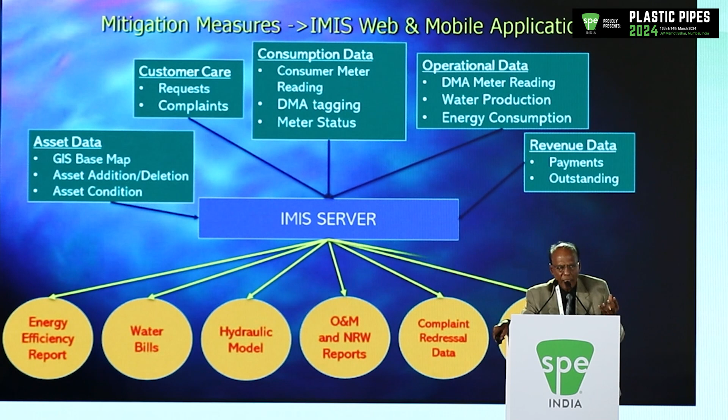Now, close to my chest is this integrated information management system. In a water supply system, what we have is asset data, operational data, revenue data, and customer data.

Now, if we have implemented a DMA system and my DMA meter reading is going to the IMIS server, and if my billing data and my customers linked to that DMA are giving data to the IMIS server, I can on a monthly basis work out what is the non-revenue water. These are the inputs - the green ones are input from the top, and from the bottom ones you can calculate the energy efficiency, water bills, hydraulic model, O&M and non-revenue reports, complaint redressal data, asset register, and updated maps.

I have even prepared a technical report, got it passed by a consultant, and prepared the tender document. It was approved by the Chief Secretary, but the department did not float the tenders. They were more interested in construction contracts and were not interested in this.

Achieving 24/7 water supply in Indian towns is a complex task, but not unattainable. The blend of technology, community participation, and proactive governance has shown positive results in various towns. The journey towards continuous water supply for all, though challenging, is an opportunity we can realize through out-of-box thinking and a unique approach. Thank you.